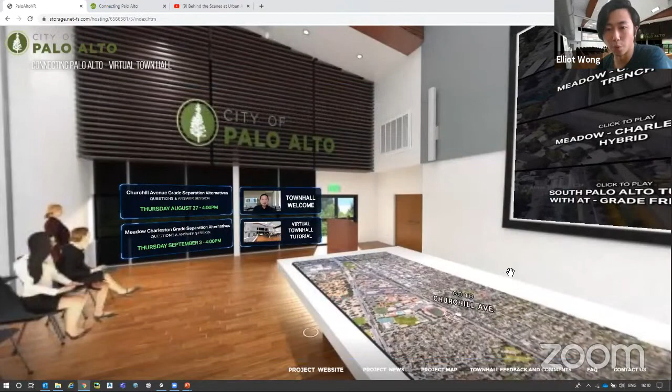As we enter the room, what we want to focus on is the right-hand side of the table, at this button right here.

We click on this, single click, to get access to all of the Meadow-Charleston alternative options currently being considered. We've got the trench, the viaduct, the hybrid, the South Palo Alto tunnel with both passenger and freight inside the tunnel. Then we've got the South Palo Alto tunnel with only the passenger in the tunnel and the freight remaining at grade. And lastly, we have the underpass.

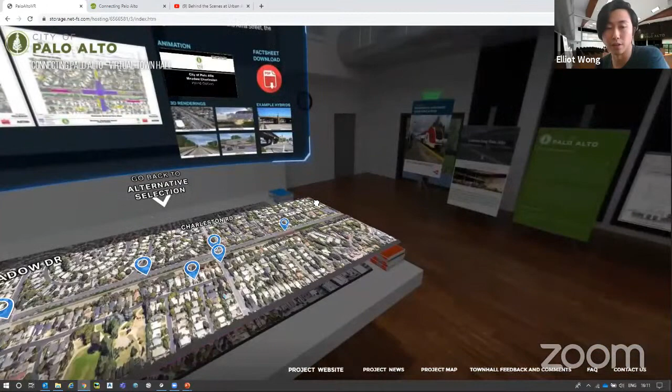So let's take a look at one of these. Let's just call the hybrid. Single click to enter into this new overlay. Within the overlay, there is a top screen and there is the overlay of the model.

All of the materials that we typically have on our community meetings, such as exhibits, are all located up top. So we've got the plan and sections, single click to access these. We've got the animation, the renderings, as well as the fact sheets.

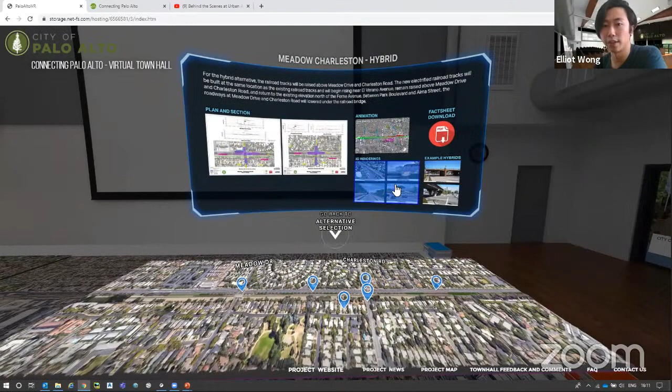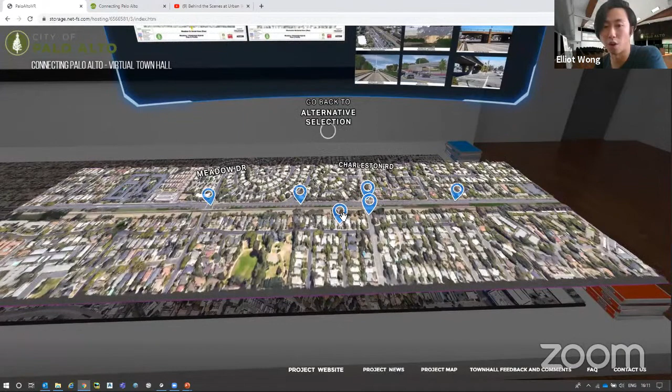On the model table overlay, all of these blue dots show a 360-degree angle of the alternative. These alternative renderings are developed from our engineering drawings, so they are dimensionally accurate.

To scroll and pan around the image here, single left click, and then you drag. This will allow you to look around and get a feel for the alternative in its surroundings, in its location. To exit out of this, click this blue cross or anywhere on the shaded area.

Then to return back to the alternative selection screen, click this blinking button. At which point the feedback form will come up and you can naturally fill in the feedback pertaining to each relevant alternative.

Great, thank you, Elliot. So tonight we wanted to give you an understanding of what we've heard so far about the various alternatives that you'll be listening to some of the questions related to in just a little bit.

But what's happening so far from the feedback is you can see here that the trench is not seen as a good alternative. In fact, very few people feel that it's either okay or good, and many more feel that this is not a good alternative to keep moving forward.

And then next, we asked the same type of question, good, bad, or okay/neutral, about the hybrid. And this one you can see has more good, but also a few more people who are neutral or don't feel this is worthy of moving forward.

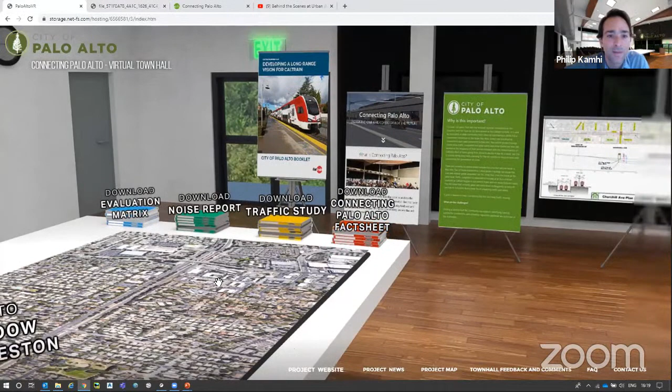Can you show where the funding and financial page is in the virtual town hall? This has a little more information, but I'll give a quick overview. Typically, projects such as these require a combination of funding sources to fund construction. Voters have approved the countywide sales tax Measure B, of which approximately $700 million is estimated to be available for Santa Clara County grade crossings. There are 8 total grade crossings and 4 of them are in Palo Alto. The city will also explore federal, state, and regional funds and other similar funding available for this type of project. Applying for federal, state, and regional grants will not be able to begin until after a project is defined.

Our next question is, where are the cost and construction timelines for the various alternatives? Let's give Philip a break and have Millette answer this one. Hi, this is Millette Litzinger, and I'm a senior project manager at AECOM.

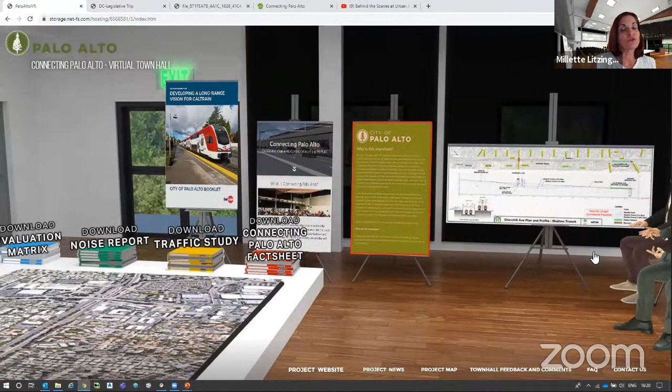This information regarding the construction timelines and cost can be found in our evaluation matrix. The construction timelines are summarized in row J of the evaluation matrix, and the order of magnitude costs are summarized just below that row. This information is also included in the fact sheets for each of the alternatives. For the Meadow and Charleston alternatives, the construction timeline for the viaduct is the shortest at 2 years.

The hybrid and underpass alternatives are approximately 4 years, while the trench and tunnel alternatives are the longest at 6 years. As for cost, the hybrid is the least costly to construct at 190 to 230 million, followed by the underpass at 340 to 420 million, then the viaduct at 400 to 500 million, and the trench at 800 to 950 million. Both tunnel alternatives are the most costly, coming in around 1.2 to 1.8 billion.

Thank you. All right, question number 8: Will the public be able to view the comments submitted by the community through the virtual town hall? Ripon, could you take that question and introduce yourself, please?

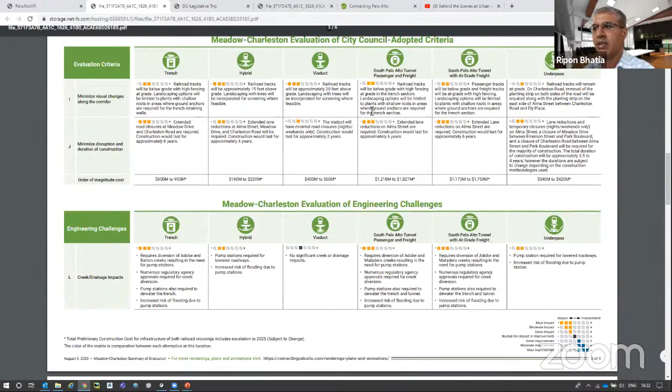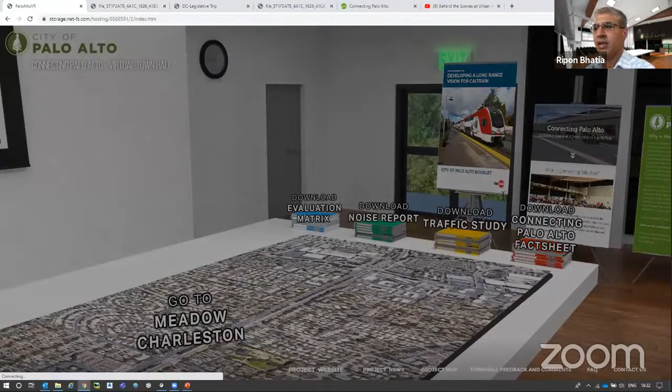Sure, thank you Eileen, and good afternoon everyone. Ripon Bhatia, Senior Engineer with City of Palo Alto. The comments and questions we are receiving through the virtual town hall are answered in question and answer sessions such as this one, and these frequently asked questions will be added to the Connecting Palo Alto website. The Virtual Town Hall also provides a link to the Connecting Palo Alto site where these FAQs are located. All comments received will eventually be tabulated and included in the meeting summary after the Virtual Town Hall wraps up. As you heard earlier, Eileen also provided stats summarizing the community's feedback received to date on the Virtual Town Hall website. These are some of the avenues through which the community can view the comments we've received.

Okay, thanks Ripon. All right, question number 9: Shouldn't a long-term tunneling alternative for the entire Caltrain corridor be considered? Ripon, could you answer that as well?

Sure. The citywide tunnel alternative was reviewed and discussed earlier in the process. After reviewing the cost and complexities of the citywide tunnel alternative, City Council eliminated that option from further consideration. Caltrain will soon be initiating a corridor-wide study, and we are not anticipating that Caltrain will consider a corridor-wide tunnel in that study. Caltrain is encouraging communities to go for grade separation alternatives, primarily due to the cost of constructing such a tunnel. So we don't believe a tunneling alternative for the entire corridor is being considered at this time.

Okay, thank you. Question 10: Is it possible to zoom into plans using a display widget, and can the profile and typical sections be downloaded? This sounds like the perfect question for Elliot.

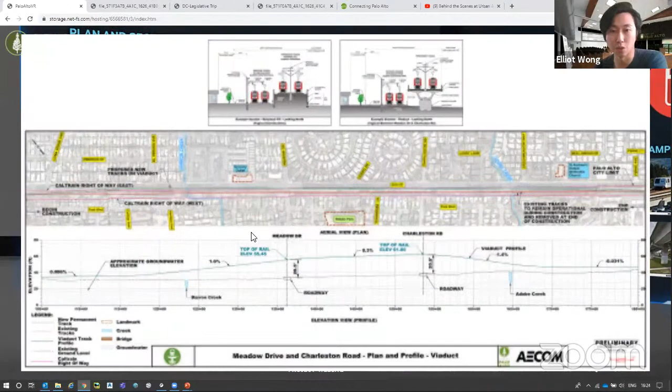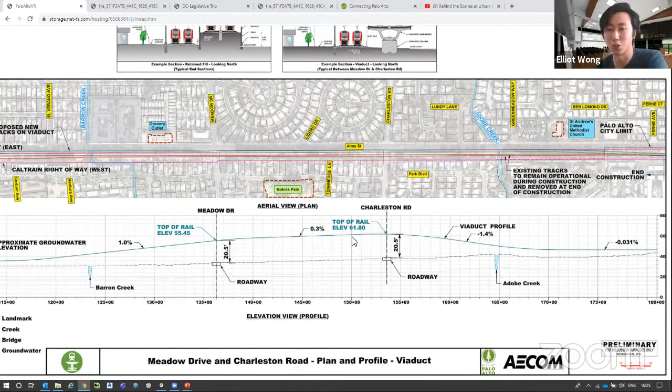Let's get into one of the exhibits first. Let's take the viaduct, for example. When we're in the exhibits or planning section, to zoom in, feel free to scroll in and out with your mouse wheel. This will allow you to take a better, more in-depth look at the exhibits we have. If you're on a mobile device, use two fingers, touch the screen, spread out to zoom in, and pinch together to zoom out.

If you want to download one of these exhibits, feel free to go into the Connecting Palo Alto website. At the renderings and animations link, all of the exhibits, animations, and renderings can be downloaded within that web page.

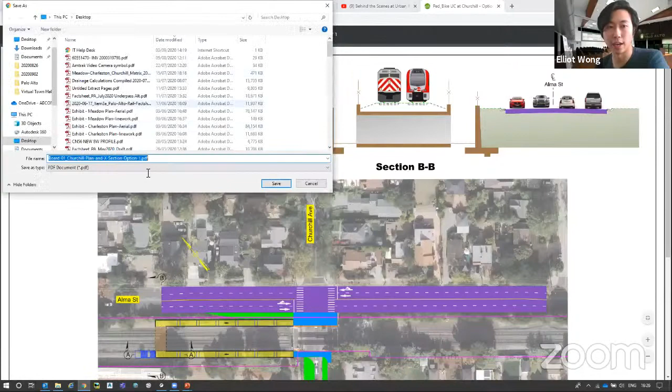Slight technical difficulties, apologize. Let's do a quick refresh of the page. Okay, it doesn't seem to be loading for me. Oh, there we go. So all of the alternatives for Churchill and Meadow-Charleston are listed as a link within this page, and to get access to one of these, single click. Let's just take the Churchill closure, for example. When it loads, there will be a button on the top right with the shape of a down arrow on the platform. Click onto this, and you can download it and save it onto your local drive.

Terrific, thank you. All right, question 11: Would construction at Churchill Avenue occur at the same time as the construction on Meadow Drive and Charleston Road? Ripon, could you answer that for us, please?

Sure. It's highly unlikely that the city will pursue construction of Churchill Avenue at the same time as the grade separation on Meadow and Charleston Road. These are long-term projects and require significant efforts for design and construction planning, so we will plan accordingly. Furthermore, funding constraints will also limit the city's ability to fund and construct these improvements simultaneously. Also, if Meadow and Charleston were done together as one project, we'll make sure that at least one of the crossings remains open so that traffic can go through at least one of them.

Okay, thank you. Question 12: What are the private property impacts for the Meadow-Charleston alternatives? Peter, could you answer that question and introduce yourself, please?

Sure, thanks Eileen. My name is Peter DeStefano, I'm a civil engineer with AECOM. So for all the alternatives, there are no property acquisitions except for the Meadow and Charleston Underpass. Elliot, if you could, let's go to the fact sheet for the Meadow-Charleston Underpass and take a look at the exhibit that shows the property acquisitions.

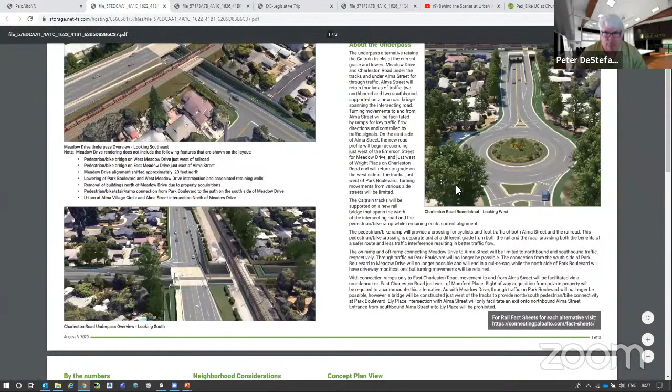There we go. On this page here, we see some shaded blue and green. The blue is full property acquisitions and the greens are partials.

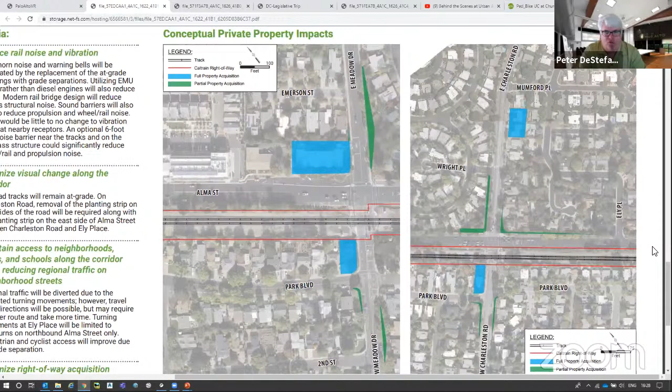On the left is the Meadow Underpass. Due to the realignment of Meadow Drive to the north, there'll be a property acquisition on the northeast corner of Alma and Meadow and on the northeast corner of Park and Meadow. In addition, to accommodate the project geometrics, there'll be some narrow partial acquisitions shown here in green that front Meadow on each side of the street, on the south side east of the tracks, and west of the tracks on both sides of the street, as you can see in the shaded colors.

And for Charleston, similarly, we'll have some full property acquisitions and some partials. The shaded area up there near Mumford is to accommodate the roundabout. On the west side of the tracks near Park Boulevard is to accommodate the ped bike path on that side of the street. And again, we'll have narrow partial acquisitions on both sides of Charleston and also along Alma from Charleston down to Ely Place.

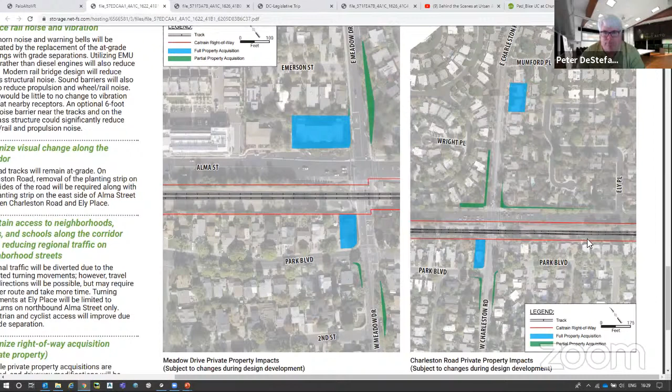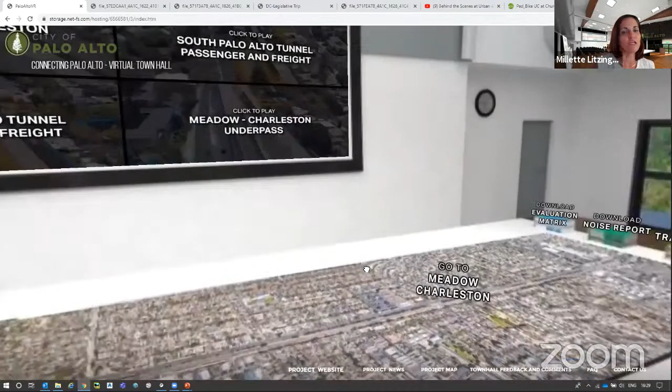Number 13: what are the long-term maintenance costs of the Meadow-Charleston alternatives? Millette, could you answer that please? Yes, we have not developed costs for the long-term maintenance items, but we have identified the anticipated items. I'm going to ask Elliot to go to the evaluation matrix we were looking at previously. This information can be found in row M of the evaluation matrix.

Items include pump stations for dewatering for all of the alternatives except the viaduct. There's also mention of lift stations and siphons for the creek diversions, for the tunnel and the trench alternatives.

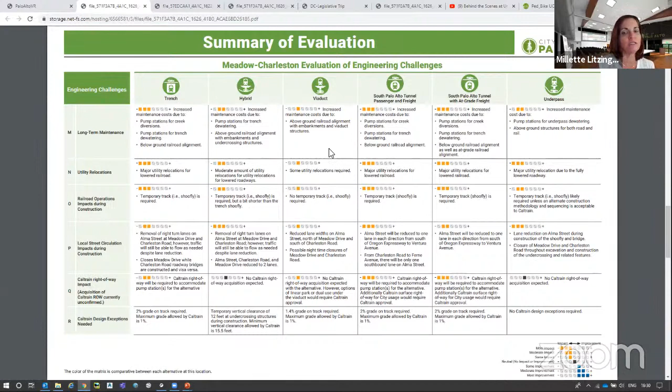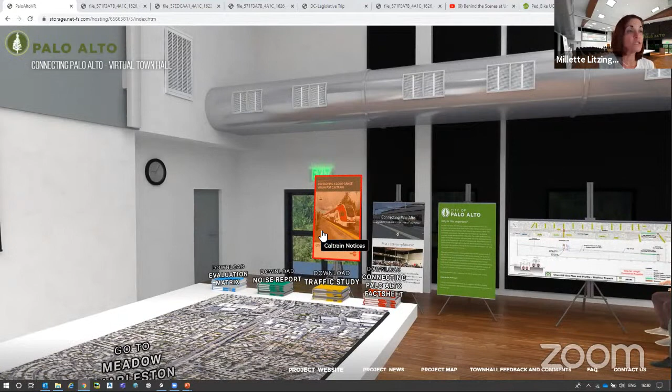I wanted to note that Caltrain has provided some clarity on who would be responsible for maintenance costs related to the railroad. Caltrain has said that Caltrain will take on maintenance responsibility for new infrastructure that will raise or lower the tracks by embankment, viaduct, or bridge. However, the city should assume it would be responsible for the cost to maintain a trench or a tunnel alternative.

If you wanted to explore more of the text in the answer to this question, Elliot's showing you where our Caltrain notices are, and that far one on the right that's labeled Caltrain email grade. It has a list of questions, and this is one of them where they answered about what the maintenance responsibilities would be in the future.

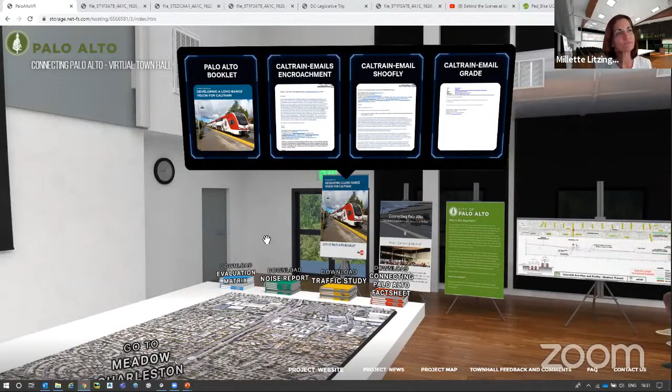Okay, thank you. All right, question number 14: For the Meadow-Charleston Underpass, could a box jacking system method of construction be used to eliminate the shoofly?

Peter? Sure, yeah. Well, this question came up from someone from the XCAP committee. This is a great question. First, let me describe what a box jacking system is.

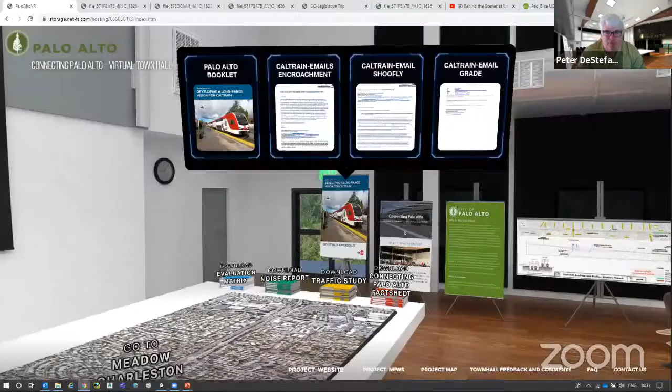Elliot, if you could go to the YouTube video and put it on pause at that point, that's perfect. Basically, this is a system that avoids the need for a shoofly track to construct the bridge. So what they do is excavate on each side of the tracks, approaching, like for example in this video, let's say this is Meadow Drive, where they excavate down approaching the tracks, they leave the tracks in place, and keep it in service for as long as possible.

Then once they're ready to get this bridge in place, they'll shut the rail down for a weekend, say a Friday night, and they'll remove the tracks, excavate down, and then slide this U-shaped structure you see in the foreground here, with the plate girder on top, into place using hydraulic jacks.

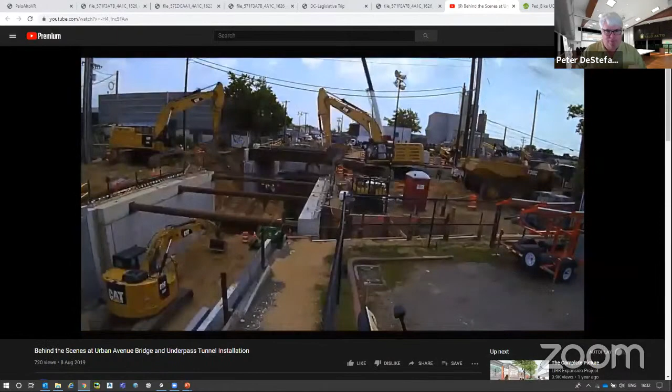Elliot, go ahead and roll the video. This is a time lapse, so it's going to hop back and forth between each side, a little confusing, but you can see the backhoes excavating the area where the existing tracks are to get the dirt out of the way. Once the excavation is done, you can see it sliding now with the hydraulic jacks on the bottom, and they just slide it right into place. This is a very intriguing idea.

And yeah, you could stop the video now, Elliot, or you could just keep it running, that's fine.

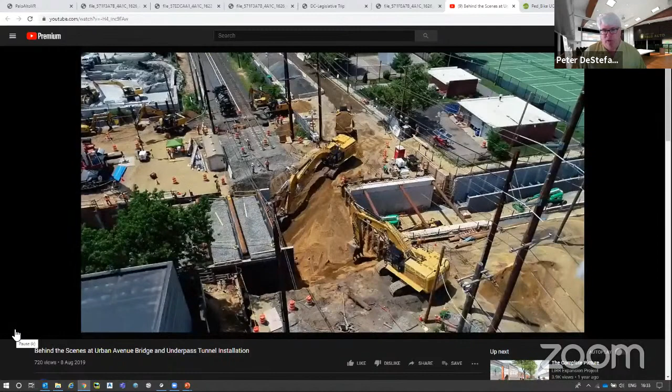This is an intriguing idea that was brought up again: can we do this? They did this on the Long Island Railroad project in New York. Can we do this on our project to avoid the need for a shoofly? There's really some more engineering that needs to get done before we could say yes or no. One of the biggest challenges is structural. Having this U-shaped substructure slide into place, it's on a spread footing. Typically in seismic country here in California, these bridges are on pile foundations to resist lateral and vertical loads in an earthquake. That's one thing of several that would have to be looked at more carefully. If we deem it feasible, we would approach Caltrain with this idea and see if it could be done.

So yes, it's possible, but whether it could be done for sure, we just don't know yet at this point.

So Peter, while you have the floor, I think it would be helpful for our audience to understand what the benefit would be of not having a shoofly, and what a shoofly actually is for the layperson.

Right, sure. The shoofly tracks are a temporary detour for the railroad, and aside from the extra cost, you'd have removal of trees in the corridor. You'd have impacts to Alma Street because the shoofly would typically have to go there. You can see those in the animations on the town hall site, showing impacts to Alma during construction. This alternative would also have an impact to Alma during construction, but maybe in a different way. So there would potentially be a lot of benefits to not having to construct a shoofly.

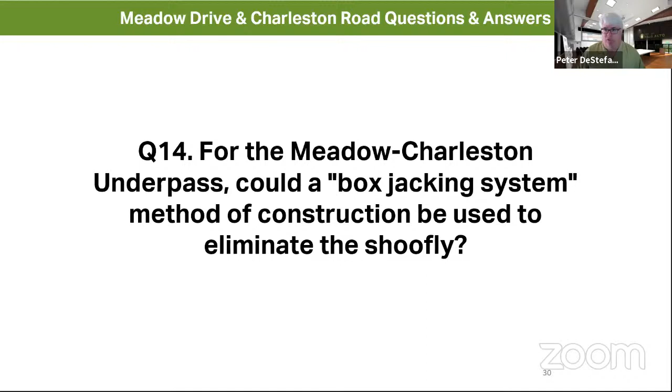Okay, thank you. Question number 15: is the Meadow-Charleston Underpass the only alternative that allows through traffic on Charleston and Meadow to cross both the tracks and Alma without stopping, Peter?

On Charleston, the answer is yes. From Alma to Mumford, there would be continuous movement for through traffic on Charleston, with no traffic lights. However, on Meadow, it's not quite that straightforward. There would be a signalized intersection at the bottom of the sag curve on the underpass, where the southbound ramp from Alma Street would connect with Meadow - a T intersection with a signalized intersection.

Okay, thank you. All right. For the Meadow-Charleston Underpass, could the ramp from southbound Alma Street to Charleston Road be deleted?

Gary, would you take that and also introduce yourself? Yeah, hello, Gary Black with Hexagon Transportation Consultants. We are the traffic engineers on the project on the AECOM team. If Elliot could show the plan view of Charleston at Alma, we can take a look at the ramp being asked about.

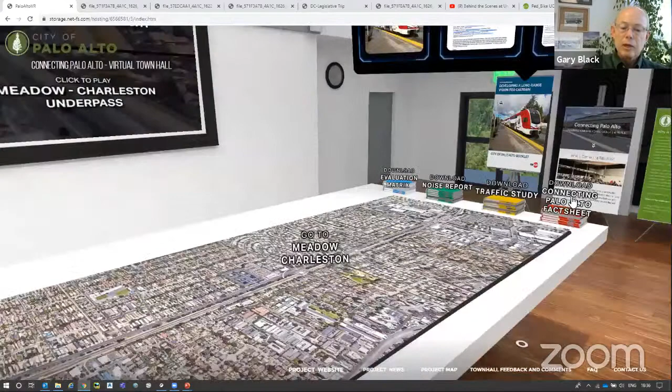That ramp is what would carry traffic that goes eastbound on Charleston and wants to make a right turn to go southbound on Alma. That ramp is very busy - our forecasts for 2030 show over 500 cars in the peak hour would want to make that right turn. If that ramp were not available, those cars would have to travel up to the roundabout, turn around, come back, and go through the signal to make a left turn to go south on Alma. Because of the volume, it wouldn't work to have that many cars make that maneuver. So in order to maintain operations for this alternative, it's necessary that ramp be part of the design.

Okay, thank you. All right, our next question: for the Meadow-Charleston Underpass, what turning movements are allowed?

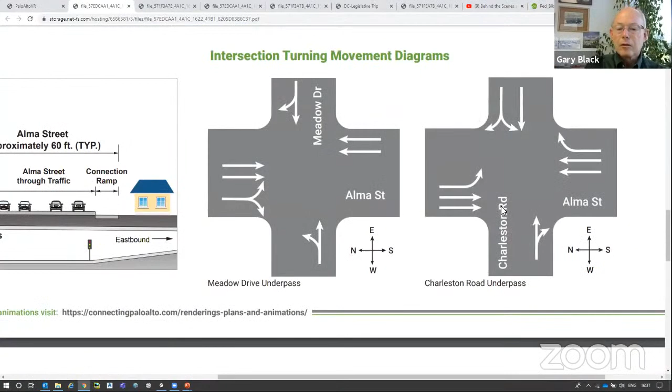Gary? Okay, well, there are two intersections that are part of the underpass plan: one at Alma Meadow and the other at Alma Charleston. If Elliot could show - there are fact sheets available in the virtual town hall that show the turning movements allowed, and we're seeing those on the screen now. A regular four-way intersection like those that exist today has 12 possible turning movements - that's a right, through, and left in each direction.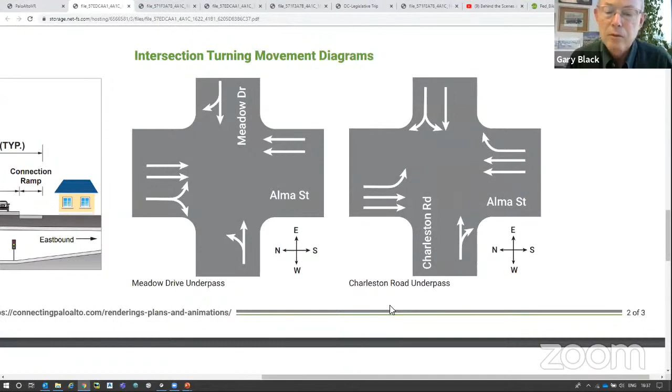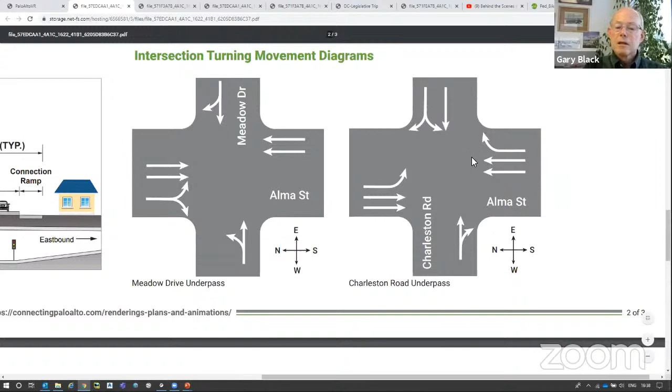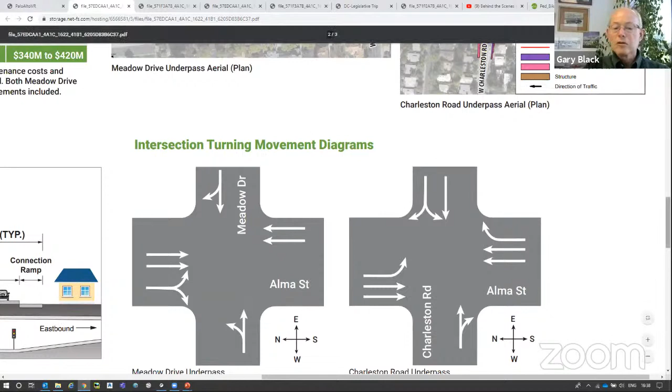At Charleston, with this underpass alternative, it would be possible to make all 12 of those movements, even though this diagram doesn't show all 12 of them. Some of the movements would be made by going through the roundabout. For example, if traffic was heading north on Alma and wanted to make a left turn to go west on Charleston, that traffic would make a right turn, travel down Charleston to the roundabout, go through the roundabout, and come back underneath the tracks and underneath Alma on Charleston. Similarly, other turn movements could be accomplished by going through the roundabout. So all 12 movements would be possible.

At the Meadow Underpass, this is not the case. Not all 12 movements would be possible here. There would be 2 movements that would not be possible, and that is for traffic going either direction on Meadow to go south on Alma. Whether they were going eastbound or westbound, they wouldn't be able to make that movement.

I should point out that a couple of the movements here would require traffic to travel up to the signal at Alma Plaza in order to make a U-turn. So that would be the traffic that's northbound on Alma that wanted to go either direction on Meadow, would make a U-turn at that signal, come back and use the ramp connection to Meadow. So there would be 2 movements that wouldn't be accommodated here.

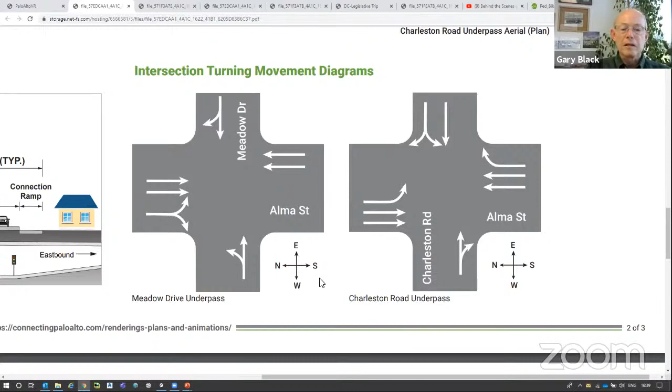All right, our next question is for the Meadow-Charleston Underpass. Since some turning movements are not allowed, is there an opportunity for cut-through traffic on the neighborhood streets? Gary, I think this one's yours as well.

Yes, there would be the demand for traffic to cut through on some neighborhood streets because of those 2 movements that we were talking about that wouldn't be allowed. Maybe Elliot could show us the plan view of Charleston so we can point out how this would happen.

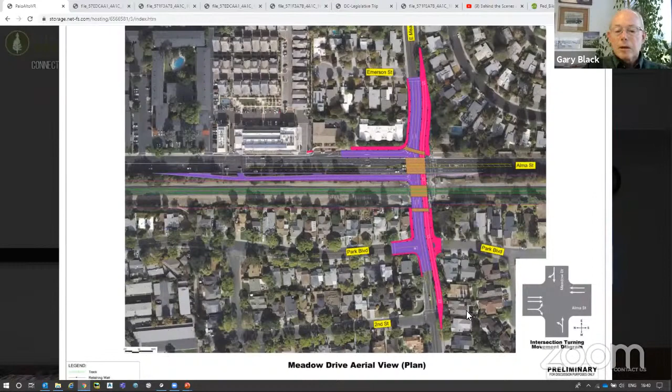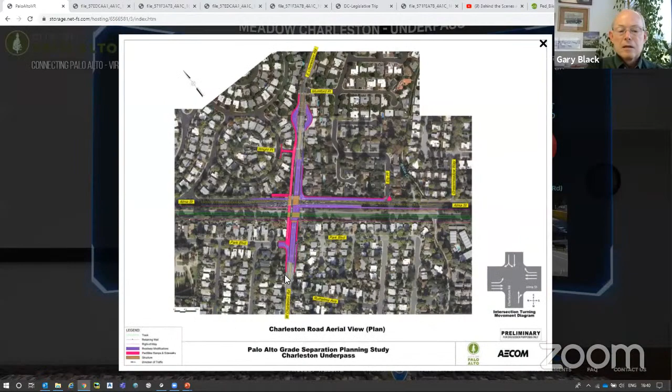For example, traffic that was headed eastbound on Meadow and wanted to make a right turn to go south on Alma, that movement would not be allowed, so that traffic would need to find some other way to get down to Charleston in order to make a right turn. There are 3 parallel streets there now: El Camino Real, Wilkie Way, and Park Boulevard. However, with this underpass alternative, Park Boulevard would be modified at Charleston, so it wouldn't be possible to make a left turn, meaning Park could not be used. So that leaves Wilkie Way and El Camino as the way to make that connection.

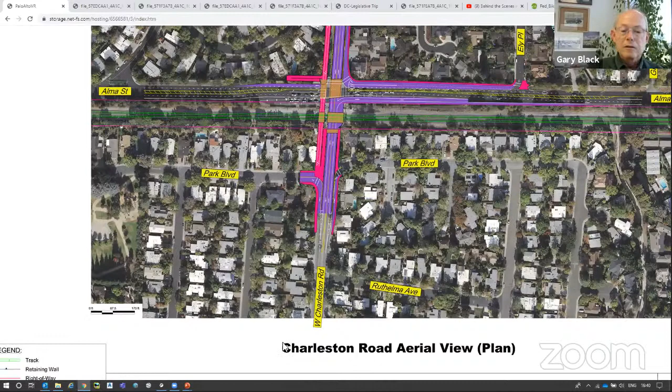Then on the east side, if you're heading westbound on East Meadow and you want to go south on Alma, you have to make your way down to Charleston to do that. So there would be a demand for traffic to cut through the Fairmeadow neighborhood on some neighborhood streets to get from East Meadow down to Charleston. To put some numbers to it, during peak hours there are about 80 cars per hour that want to make these turns to go south on Alma. That would be the potential volume that would cut through these neighborhoods.

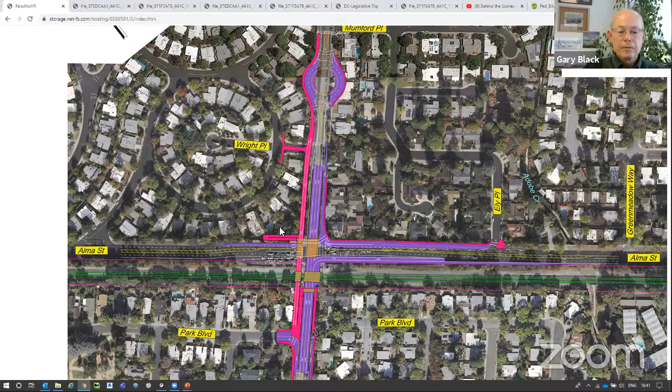For question number 19, for the Meadow-Charleston Underpass, will motor traffic increase on Wilkie Way? Gary: Yes, as we were just talking about, Wilkie Way provides a direct connection from East Meadow to Charleston. So that would be one of the routes traffic could use to get from East Meadow to Charleston with the underpass alternative in order to go south on Alma. The volume of traffic in the peak hour making that right turn now is about 80 vehicles, so all or some of those could take Wilkie Way.

Okay, thank you. Question 20: For the Meadow-Charleston Underpass, was there any additional traffic analysis performed to ensure that streets can handle the cut-through traffic due to additional movements around the roundabout or Alma? Gary: Yes, the traffic study includes extensive analysis of the operations of the underpass alternative. If Elliot goes to the virtual town hall, he can point to where you can find the traffic study, so you can go there and read all about it. The shortcut answer is yes, the streets, intersections, and roundabout can accommodate the traffic for the underpass alternative.

Okay, thank you. All right, question number 21: For the Meadow-Charleston Underpass, can the sharp corners cyclists have to navigate be modified? Peter, can you take that one? Sure. Yeah, so on these 2 alternatives, there are some 90-degree and even a 180-degree turn for the bike path.

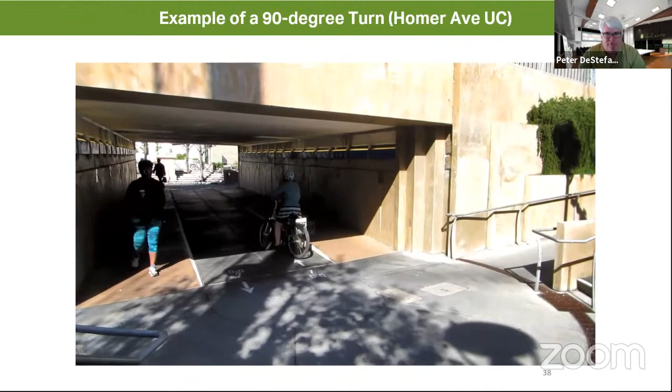Elliot, if you go to the next slide and hit play. This is a 90-degree turn at the Homer Underpass here in Palo Alto. As you can see, this bicyclist is taking this turn very slowly.

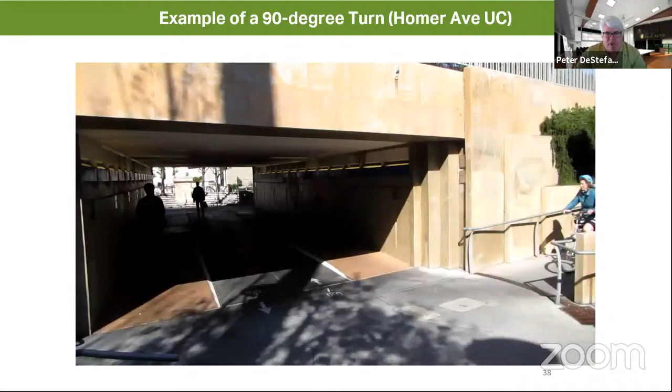I think the short answer to this question is there is room for some refinement of the designs, but I don't want anyone to have an expectation that we're going to have these long sweeping curves due to the right-of-way constraints we have on this project. So a situation like this would be one we'd have on our project as well.

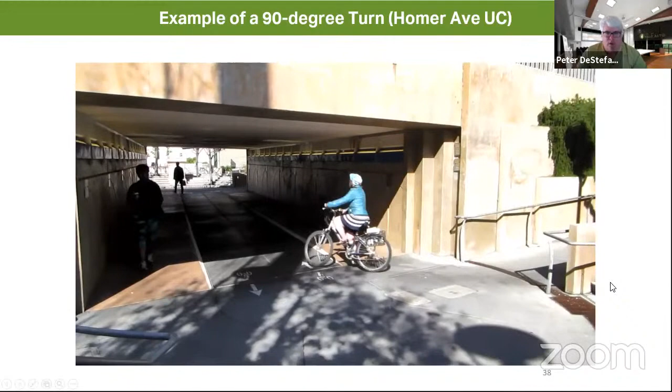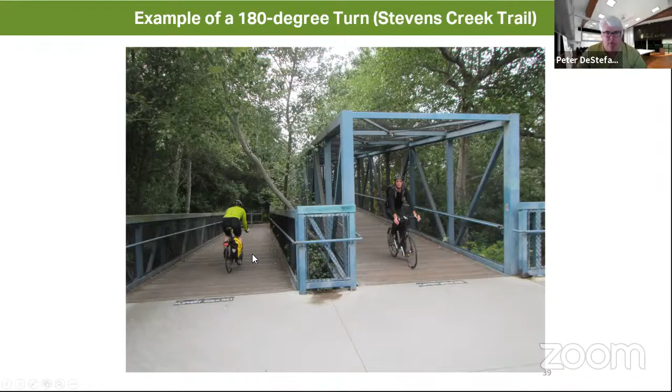I also have a sample of the Stevens Creek Trail in Mountain View. Here's a 180-degree turn. Elliot, if you could click on the next slide, we could show the animation of how slowly people have to make this turn. They have to be careful because it's pretty tight. As you can see the sign on the left, it says 5 miles an hour. So we're looking at very low speeds for bicyclists around these sharp turns.

Thanks, Peter. All right, our next question. For the Meadow-Charleston Underpass, are the plan and section drawings missing some dimensions on vertical clearance? And is an 8-foot vertical clearance adequate?

Peter? Sure, let me take the first question here first. There were some dimensions that were missing. We've since added them to the exhibits and they're now posted to the website.

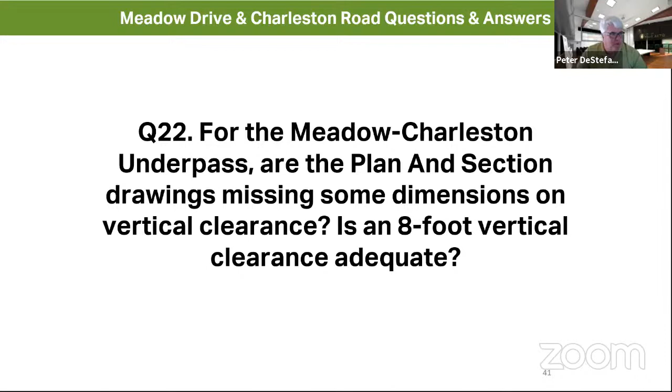Now, is an 8-foot vertical clearance adequate? Let me just read a quick blurb from the Caltrans HDM: the vertical clearance across the width of a bike path shall be a minimum of 8 feet, where practical, a vertical clearance of 10 feet is desirable.

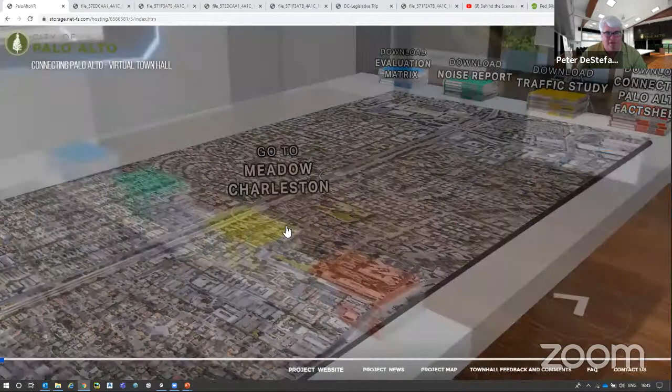The second constraint is the railroad bridge. The rail elevation itself is fixed, and based on a certain structure depth, we get about 8 feet of vertical clearance. That said, some refinements during final design could be made where, let's say, we reduce the structure depth and could increase the vertical clearance there slightly.

So you can see those other dimensions. We aim for 10 feet minimum, and I believe 8 feet is the only case where we have less than 10 feet on the ped bike paths for either Meadow or Charleston. So this is a little bit of an unusual case, but 8 feet is adequate. Again, we try to shoot for more when we can.

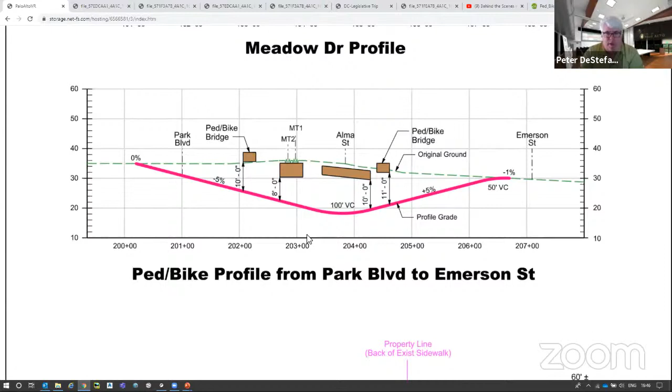Okay, thank you, Peter. All right, our next question is for the Meadow-Charleston Underpass: where do pedestrians and bicyclists walk and ride, and where do they connect to the existing bike ped facilities? Peter, can you explain that to the group?

Yeah, so Elliot, if we could take first the next slide, we got an image here of Meadow. Before you click, let's get everyone oriented here. I'm going to show the path of travel heading west, starting at the top of the page. You're going to see a black dotted line, and that's the path of travel for the bicyclists. We'll be heading west on Meadow. Go ahead and click play there, Elliot.

So as we head down towards, hit rewind on that, just do a single click, it should animate. There we go. We head towards the crosswalk near Emerson, cross the street, get onto the ped bike path that goes underneath Alma, underneath the tracks, underneath the ped bike bridge, and then eventually comes to 2nd Street where there's another crosswalk. So the bicyclists could use the crosswalk to get to the other side of the street and connect with the Class 2 bike path on Meadow.

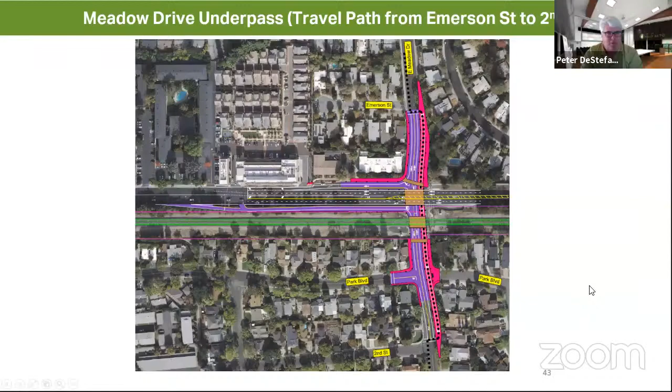And then similarly, let's take a look at Charleston. I'm going to do the opposite, starting on the bottom of the page and working our way east. Again, we're connecting to a Class 2 bike path near Ruthelma, which is just off the screen on the bottom. Elliot, if you could do a single click, we could start that animation.

We'll run parallel to Charleston, cross a bridge over Charleston, come back in the other direction to the west, do a 180, and then start the descent under the tracks, underneath Alma, start the ascent back up towards Wright Place, cross Charleston, go through the roundabout, and then connect back to the Class 2 bike facility near Mumford Place.

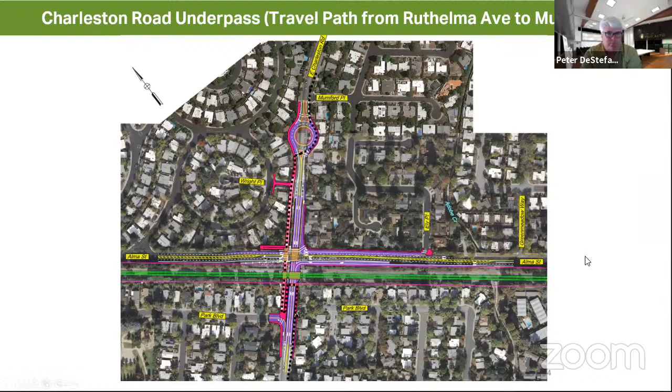Thank you, Peter. All right, our next question is for the Meadow-Charleston Underpass. Will there be a signalized or controlled crossing on Meadow at Emerson and 2nd Street to allow for pedestrians and bikes to cross? Ripon, could you take that one, please?

Sure. The city will consider additional improvements in subsequent phases of the project to determine appropriate traffic control devices for such intersections within the project. These devices could include signing, striping, and pedestrian-bike crossing signals. The design development phase will include evaluation and detailed design of such traffic control devices. We'll make sure these devices are designed to meet the California MUTCD, or Manual of Uniform Traffic Control Devices requirements, so pedestrians and bicycles can safely maneuver at these locations. These improvements will eventually become part of the construction of the project.

Okay, thank you. Question number 25. Is it possible to select the hybrid alternative for Meadow crossing and the underpass for Charleston? Ripon, could you explain that?

Sure. This question also came up in the XCAP meeting. We had done some preliminary analysis which indicates that the roadway improvements can accommodate the two alternatives independently at either Meadow or Charleston location. However, there would be some additional design and improvements needed to accommodate these two independent solutions. The hybrid alternative raises the track by 14 feet at Meadow, and the distance required to transition railroad grade from 14 feet to match existing grade, meeting Caltrain's requirements, is greater than the distance between the two crossings. As a result, the railroad tracks may need to be elevated at both crossing locations.

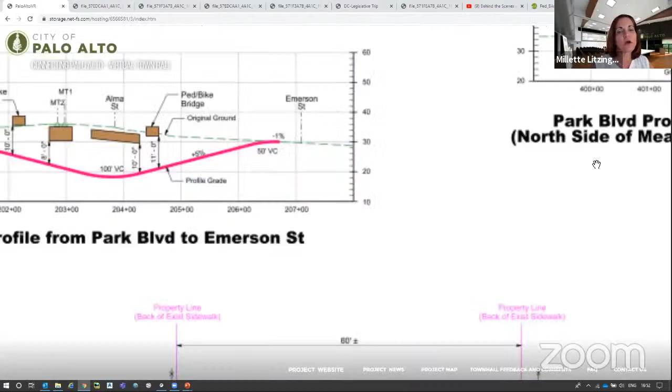Other design changes, such as reducing the grade and vertical clearance within the tunnel, were explored. But ultimately, Caltrain indicated that changes to the design criteria could not be assumed. Specifically, I'll read a quote from a letter in that same location Elliot showed you previously, where the Caltrain notices are. Caltrain's response was: any changes to Caltrain standards must be considered in a way that is careful, deliberate, and fully and fairly weighs both the benefits and consequences, and should be undertaken on a system-wide basis.

Okay, thank you. Will the tunnel alternatives reduce the number of lanes on Alma Street? Elliot, could you answer that question, please? Yes, we covered this within the animations, and we have it in detail for both the North Portal and South Portal at both tunnel alternatives. Feel free to have a look at that on your own time.

But in summary, for the alternative with passenger and freight trains inside the tunnel, on the North Portal, Alma Street will be reduced down to one lane in each direction, and at the South Portal, only the northbound Alma Street lane will remain. The southbound will be occupied by the shoofly. This situation will be during the construction phase, and once construction is finished, the shoofly tracks are removed and Alma Street is restored as is.

In the alternative with freight on the surface and the passenger train inside the tunnel, due to the smaller diameter, we can shrink the shoofly and the tunnel box width a little bit as well. This would allow one open lane in each direction for both North and South Portal. But because the freight alignment will remain as is, after construction the shoofly tracks remain there to serve the freight. So Alma Street is permanently altered to one lane in each direction.